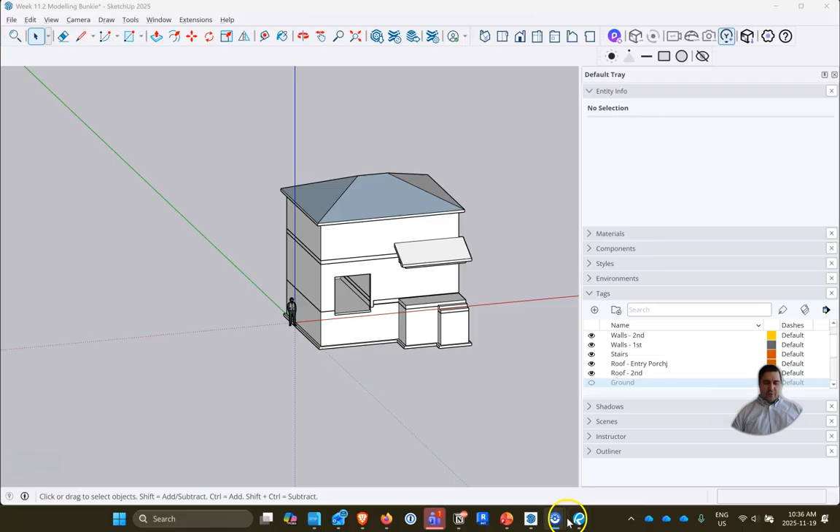All right, so in the last couple of weeks we modeled our building, and when you look at the drawings, the one thing most of you will notice is in this garage area we have this step footing area. The idea behind this is we don't have any basement below this garage, so why spend the extra money on forming all that formwork and digging down so deep and pouring all that extra concrete if we don't need it? So let's step the footings up, and then we don't have to pour as much concrete. We can save materials, we can save effort.

And so the building code has some rules associated with that. Is it not more labor to form that? Not necessarily. A lot of it ends up being about materials and concrete. So it might be a little bit more work to form a step footing, but it's often less materials, so less concrete, less rebar. Theoretically it's maybe a little bit more labor, but less money overall. And if this was a bigger building, you'd definitely see that cost trickle down. With a small building like this, maybe not, to be honest with you.

So the building code talks about how to do a step footing. Basically the building code states for every 4 feet in length, you can drop a maximum of 2 feet. So when we look at this, we're extending less than 4 feet and we're dropping less than 2 feet. We theoretically meet those requirements, and really it's about the angle as well.

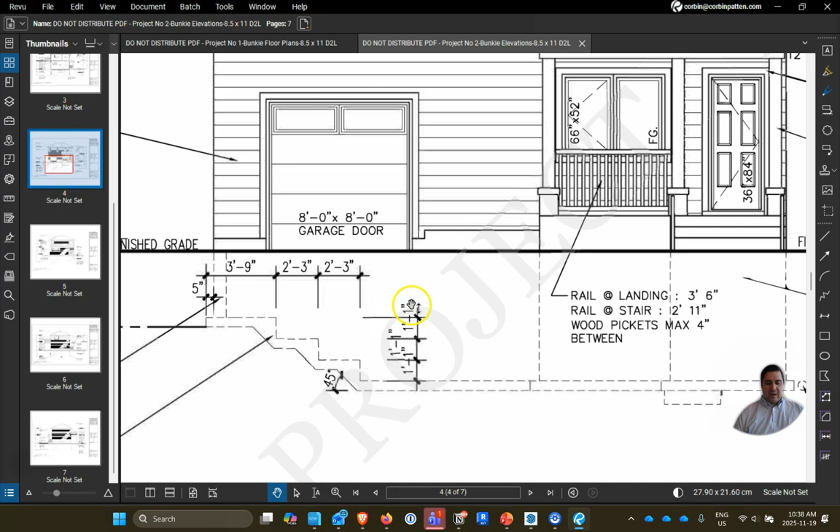So let's start modeling this up. What I'm going to do to start is I'm going to start at 3'9", and I'm going to work this direction and create a bit of a way for us to know those numbers. So let's go back to our SketchUp here. Our first number is 3'9".

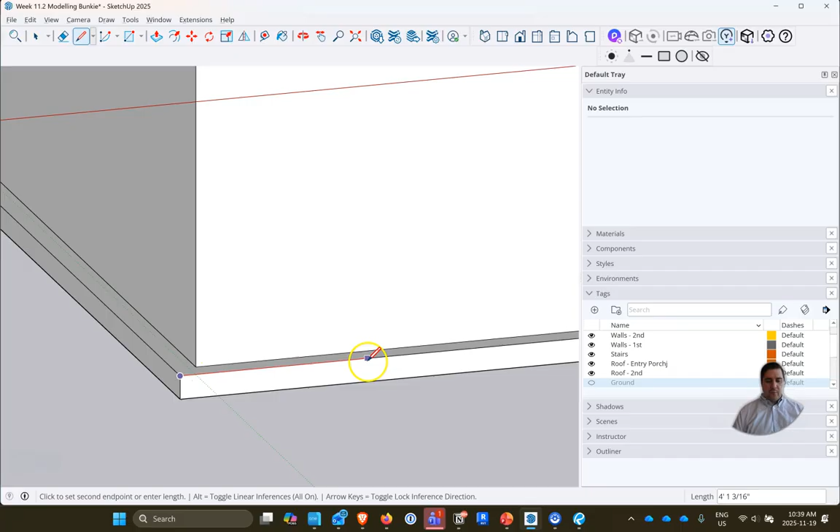I'm just going to start on the outer edge of our footing. We're going to go in 3 feet 9 inches. You'll notice that I'm specifically not editing the group. I'm going to actually create these lines outside of the group, and it's just going to provide me a reference, so I don't have to create all these lines within the group and then edit and remove them. I'm just going to do it outside the group, and then it's easier to remove later.

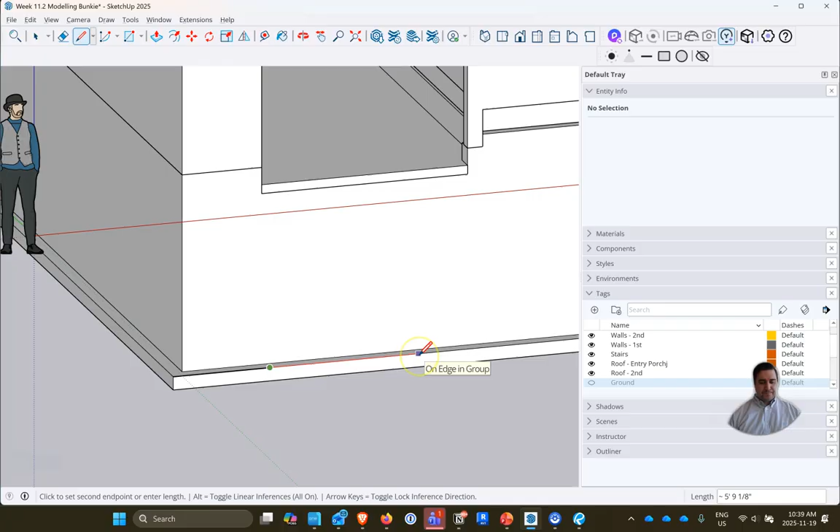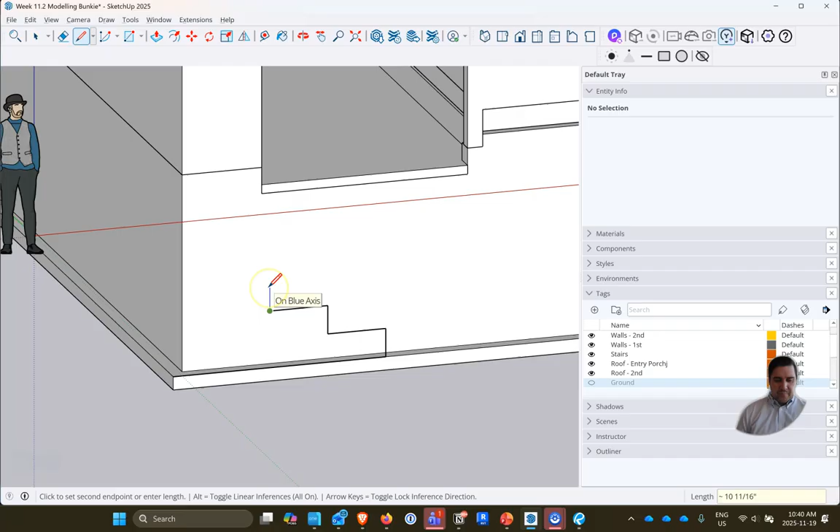So 3 feet 9. Next one is 2'3", and we've got 2 of those. We've got 2'3", and then we've got 2'3" again. Now we're going to go up. Our first step up is 1'1". We're going to go over this way our 2'3", which will connect here. We're going to go up our 1'1", and over our 2'3", and we'll go up again 1'1", and we'll go all the way to the end here.

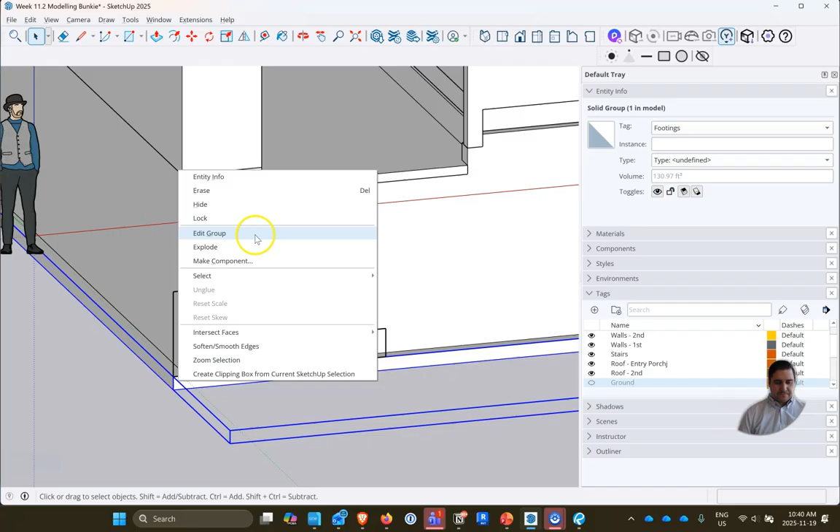And so that ends up being our footing. I'm going to delete this inner face, this inner part here. And what I'm going to do is edit our actual footing layer now. Let's edit group. So I've created those lines to trace, and it just gives me a starting point. That's super easy. So let's trace these now.

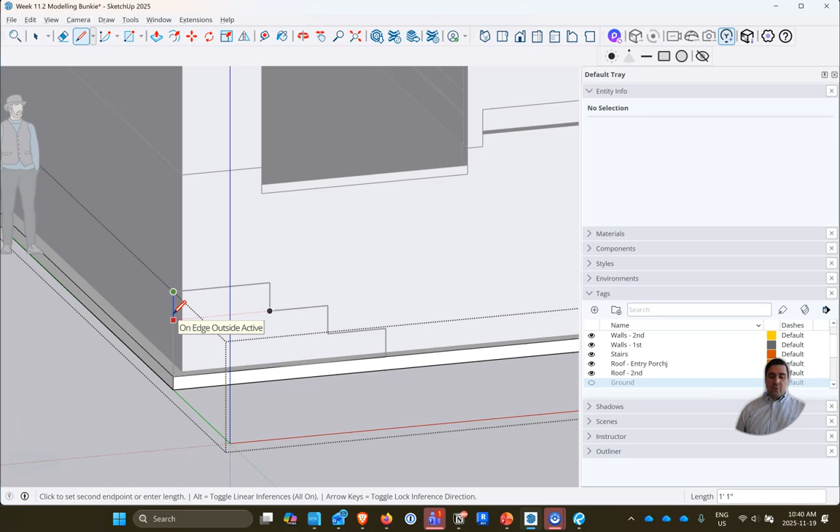Our footings are 6 inches tall, so instead of actually going all the way to the bottom, we're going to go over 6 inches, and we're going to bring that all the way across. We're going to go over our 6 inches. And we have these little steps here. So those are our footings.

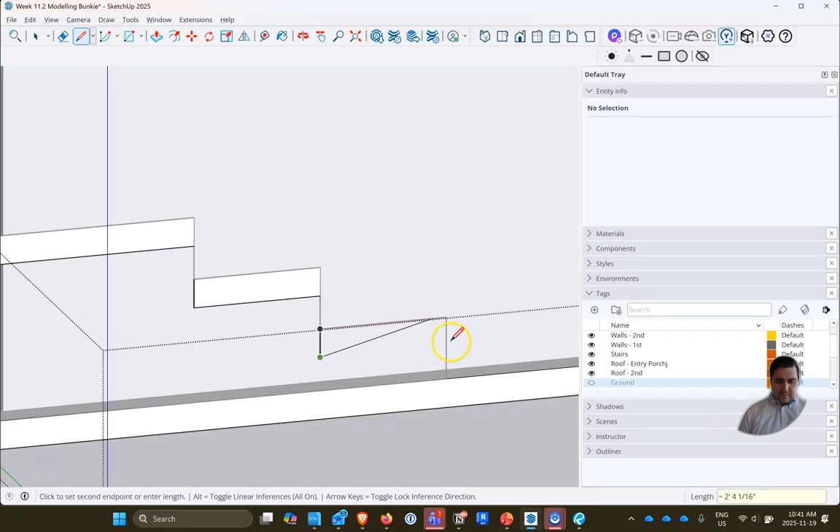The one thing you'll notice with the drawing is there's the angle part. If we just put our concrete like this, there would be nothing that really prevents it from moving because there's not really any stability. So what I'm going to do now is go back 6 inches, and go up. The reason why I'm going to do that is I want to create a bit of overlap, using the footing depth as our overlap number.

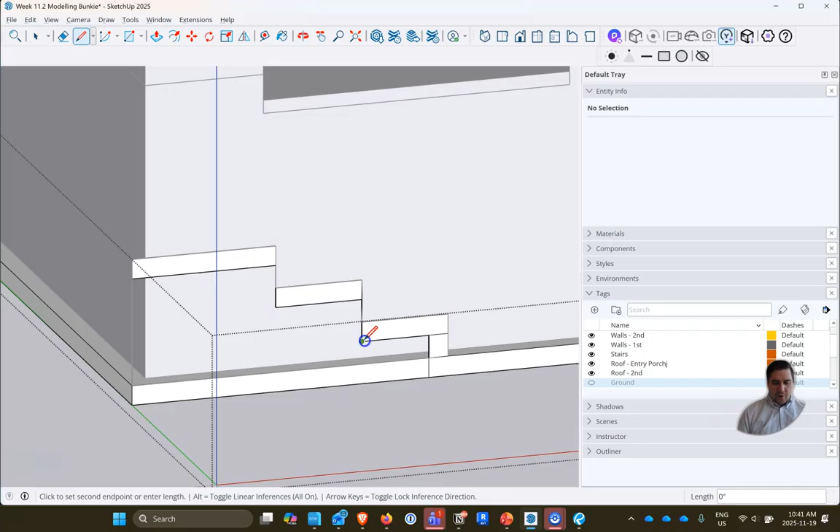So let's do that for all these 3 pieces. I could probably do this faster, but I also just want to explain my thinking. So let's go over 6 inches and then up. So again, we have our steps now. Our footing kind of follows that. But again, we have nothing to really hold that footing in there.

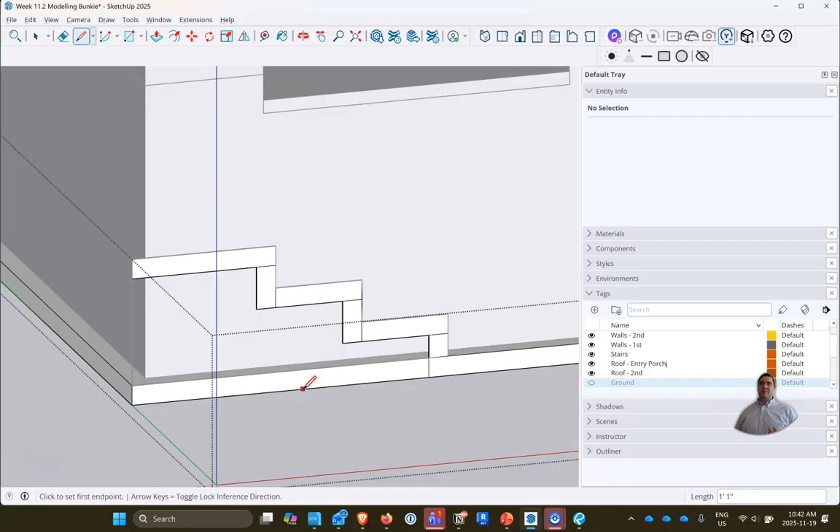What's really going to hold that footing is that slope. That slope is going to provide a lot of grip for these footings and prevent them from moving and doing weird things. So our height is 1'1". If we want to do a 45 degree angle, we're going to go 1'1" this way, 1'1" up, find that line and just draw that angle in there. And do the same here, 1'1", angle, 1'1", and then angle. Now that we have all of this in here, let's go and get rid of some of these lines.

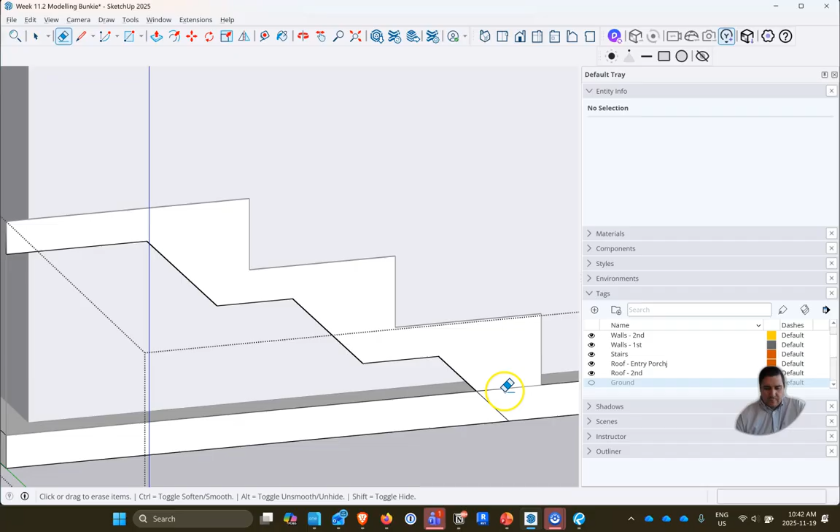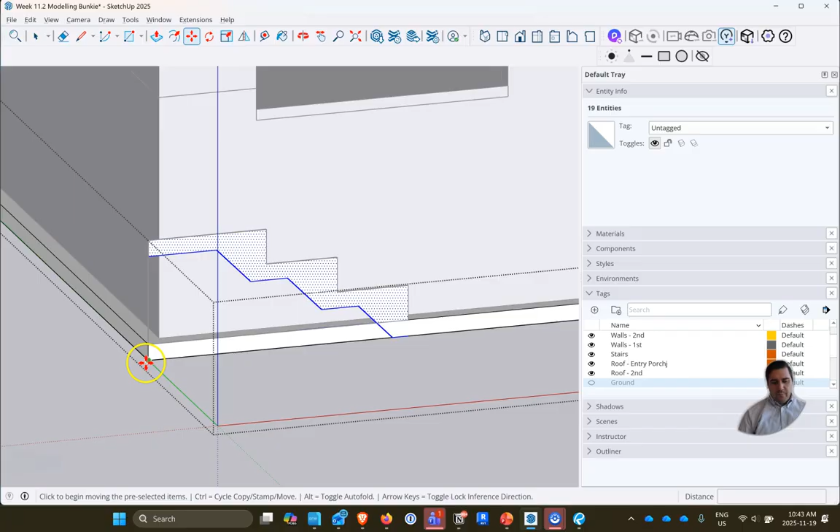One thing I'm going to do before I go too far, and I didn't do this in my other class—I was just thinking about this, and it might be a really effective way to copy all this. So I'm going to grab this, use the move button, and move based on this point right here. I'm going to move and hit the control button to copy, so we'll just copy that profile we just created to the other side, which prevents us from doing it twice.

So now we can do some extrusion. I'm going to hide my walls here, actually—let's hide our foundation walls.

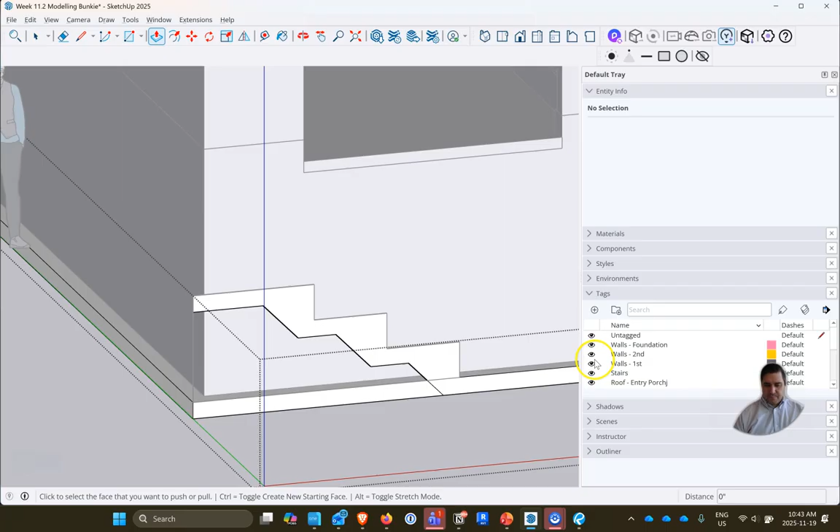I'm just going to extrude this in to our other side of our footing, and let's extrude this one in to the other side of our footing as well. I did this a little bit differently in the other class, and I was thinking about it after—I'm like, that was way too complicated, how can I do that faster? So I think this is a little bit of a faster and better way.

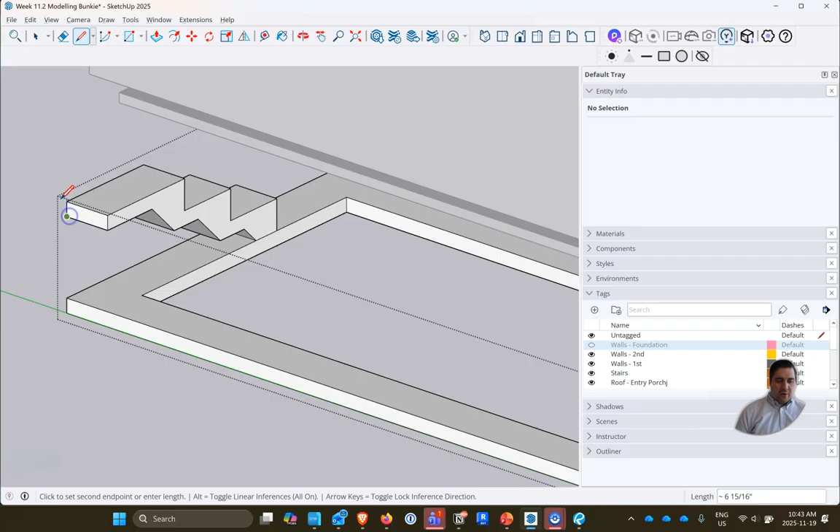Really what we want to do now is connect this whole end part here, like so—so we've got our end. Then let's just measure our footing. Our footing is 1'8", so let's extrude this part in 1'8".

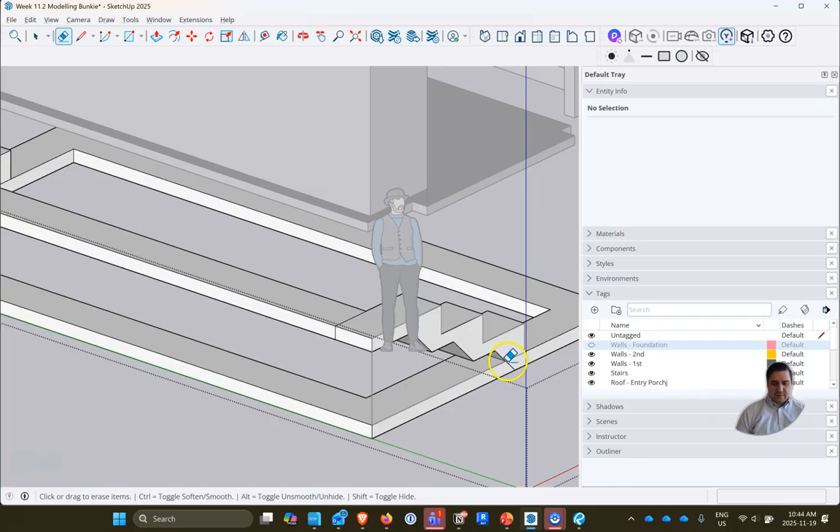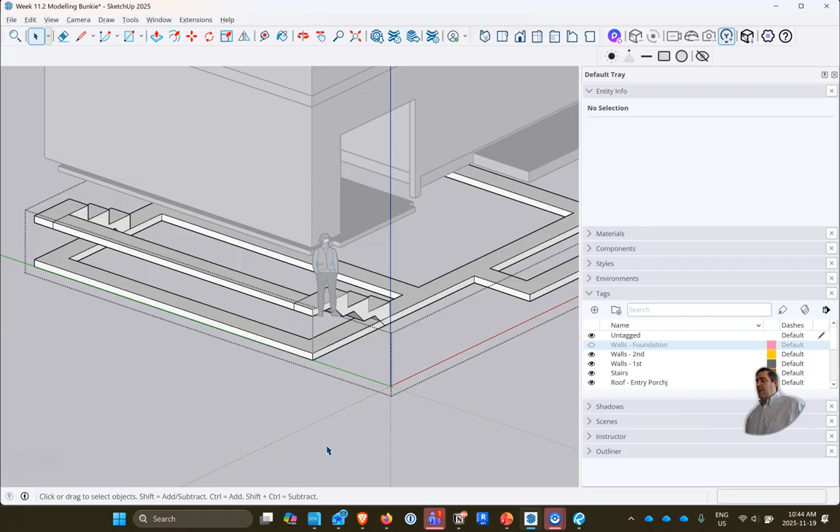And then we have a bunch of lines to clean up here. Again, as practice to improve your efficiency and simplicity, what we could simply do here is select all of this—I just don't know what lines were not created—and we can run our intersecting faces function. There may be one or two lines that just didn't get created for whatever reason, but by doing that step, it gives us a little bit of security knowing that we didn't miss a line.

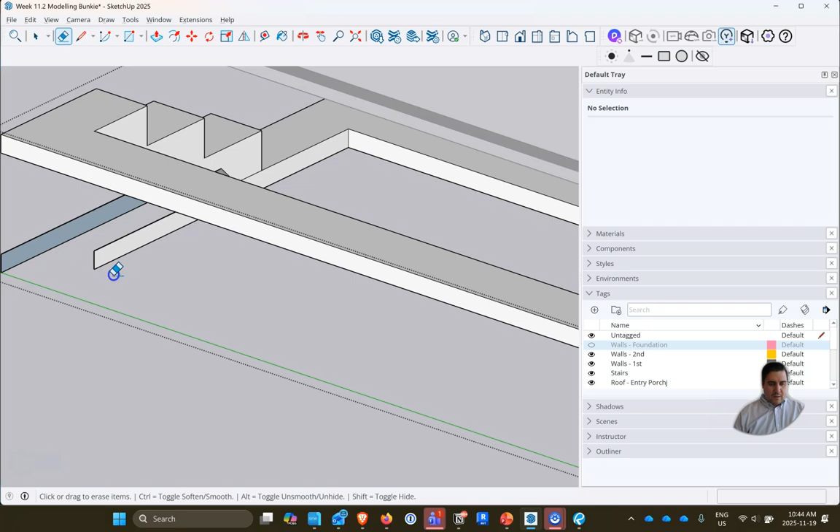So now let's go in and do some cleanup. Erase that, erase that, and we can obviously erase all these bottom lines now. We actually may have erased too much, but we'll find out in a second. Yeah, so that's what I'm kind of talking about there—it looks like we erased too much.

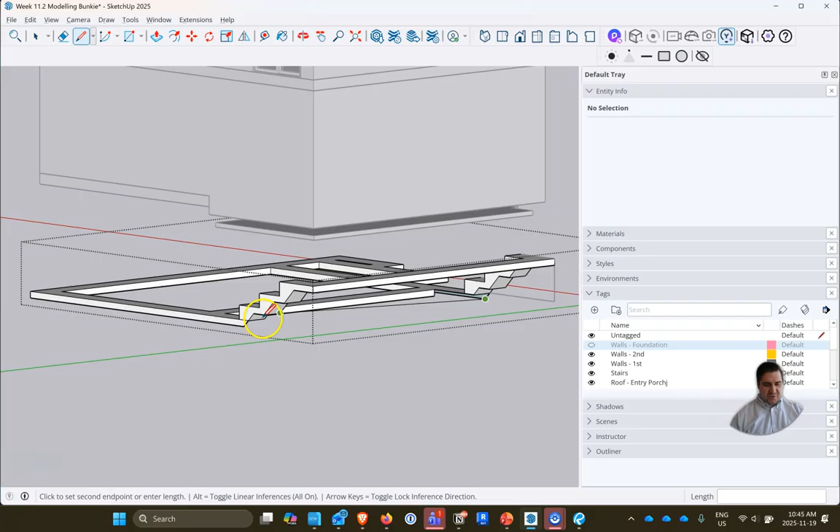But let's fix that. So we've got this line—is that going to go across? Nope, I'm just going to go straight across like this. And let's erase this now.

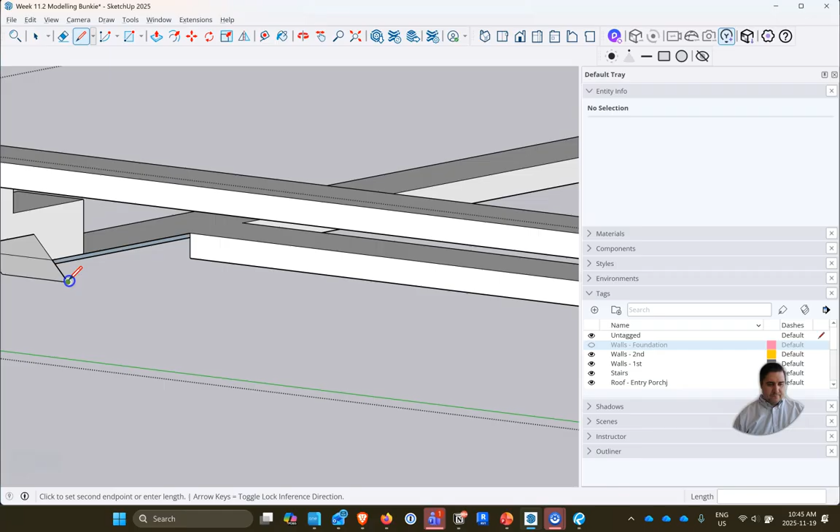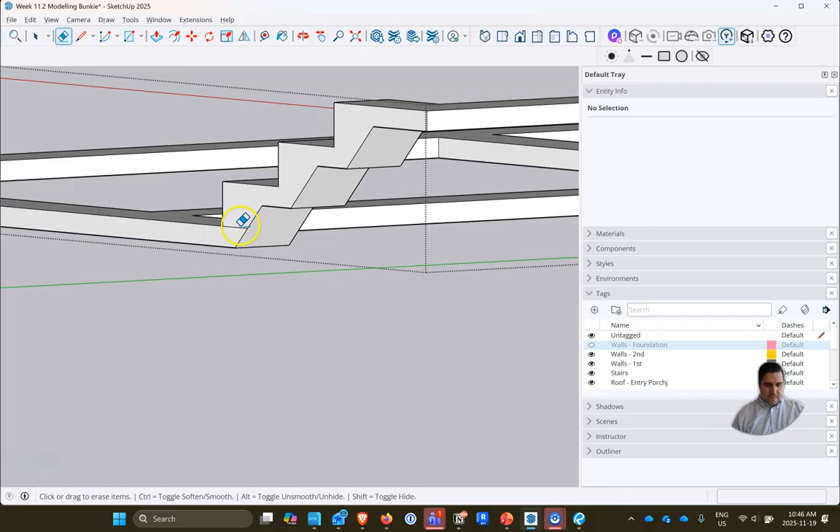And then we just got to connect this last part in, and do the same on this side. It looks like it filled in the middle here, so I'm just going to delete this middle part, and then just erase a few of these last little breadcrumbs left. I think that's pretty good—so we've got our step footings there.

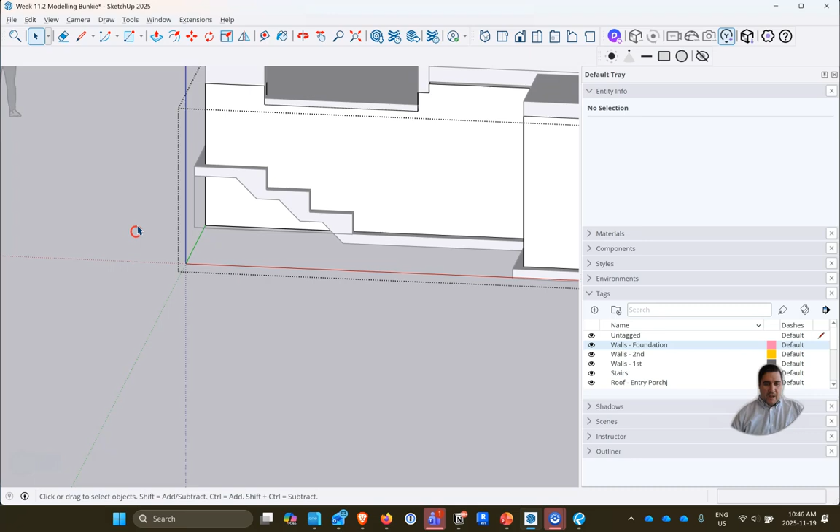So let's bring our walls back. The next thing you're going to notice is our walls also have to change. So let's go in here, close our group, and edit our wall group. Really this is just a simple tracing exercise, so let's trace these up.

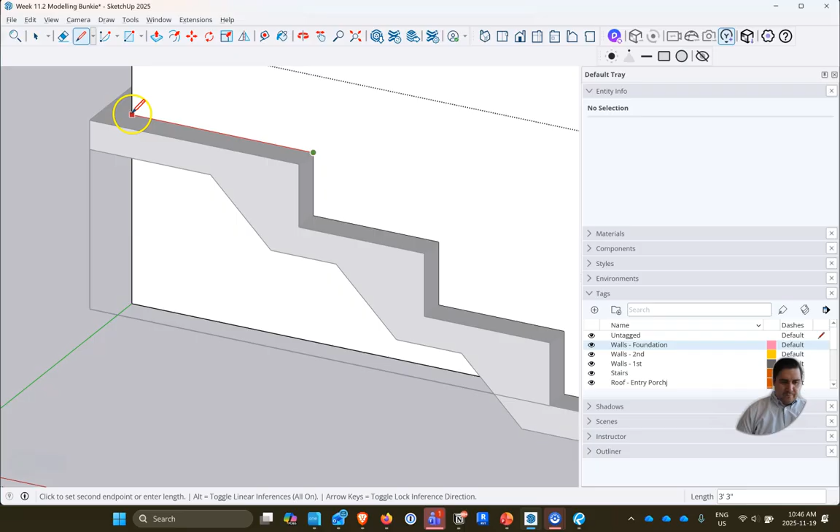What's going on there? There we go—nope, trace in the corner there. And on the inside, I'm actually just going to trace one line, if I can simply.

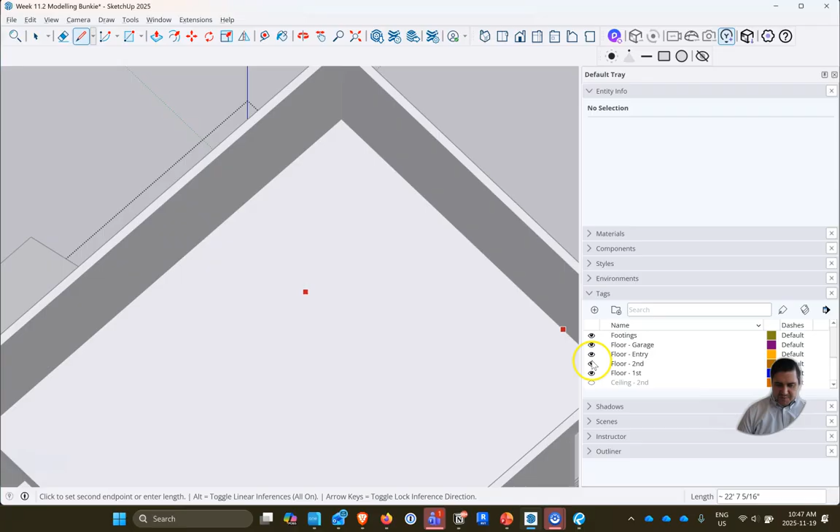Let me just turn off my roof here, and let's turn off the floors, turn off the garage floor. So I'm just going to trace this inner one—this inner one might be a useful one to trace.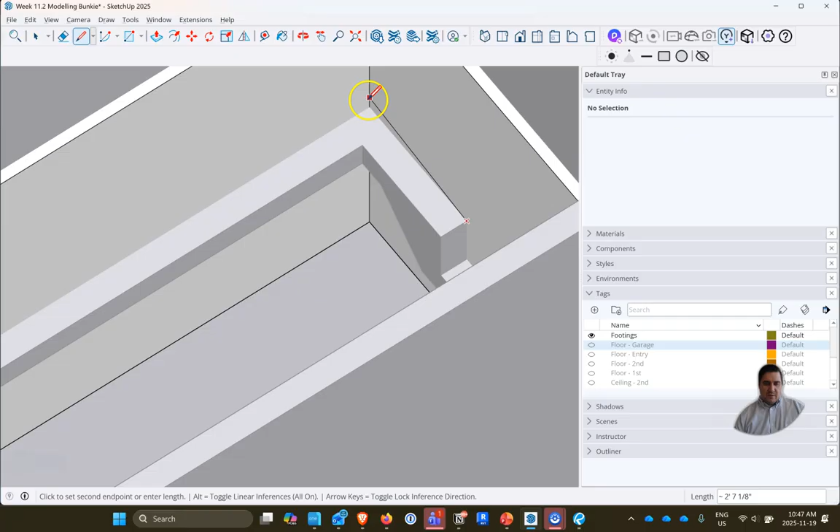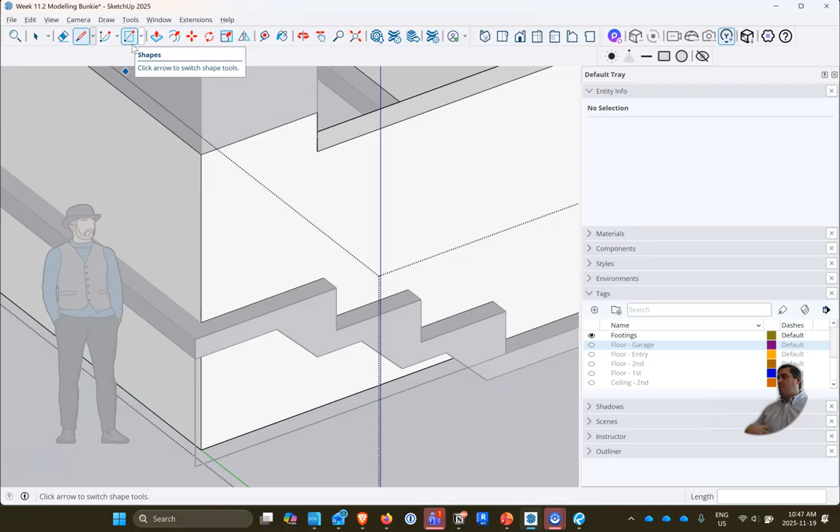And the reason why I'm also doing that is because we have this wall here. When I was doing it in the other class—this was me foreshadowing because I knew what it did—it didn't extrude through nicely, and I had to create a few more lines. So I think by starting with that, it prevents you from doing another step.

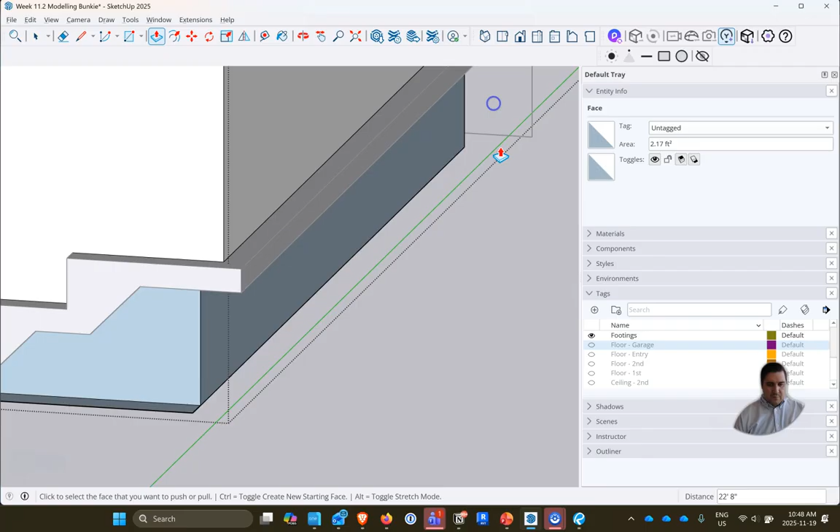So now let's extrude this bottom part through, and we can extrude this through probably to the other side as well, maybe. Yeah. And then this part we can—let's extrude this right here. Let's see if we can extrude that through. There we go, and then we should be able to just erase a bunch of stuff now.

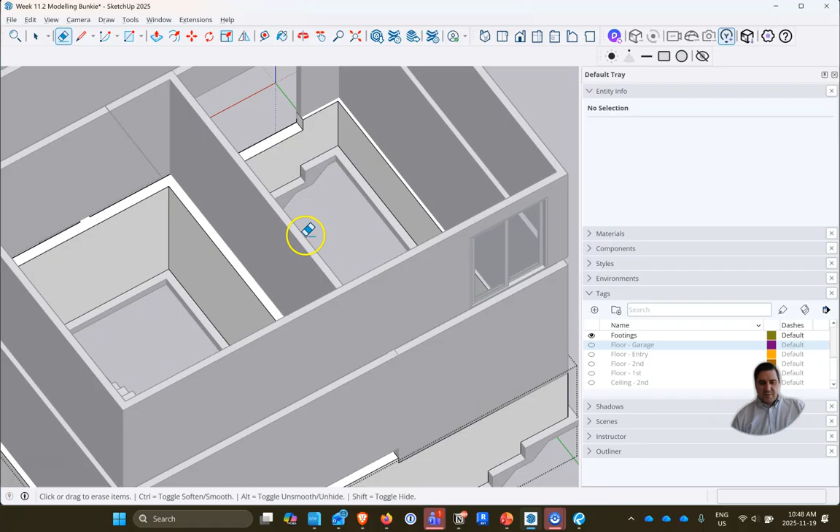How does that look from in here? Yeah, so there we go—we've got our walls stepping. I think that looks pretty clean. Oh, we're missing some lines here—that's what I was trying to avoid, but it's okay, we didn't do too badly.

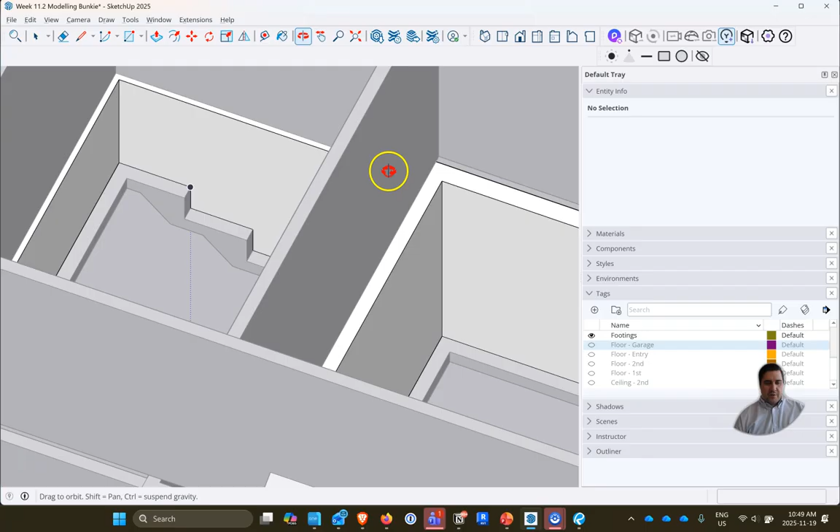There we go, just that one to fix. And so that's our step footing—that wasn't too bad. I think I was like 20-something minutes in the other class, so I'm faster now. That's step footings—not super complicated to do, but it is a little bit of work to do the various different steps. I didn't mean to have that pun, so no pun intended.

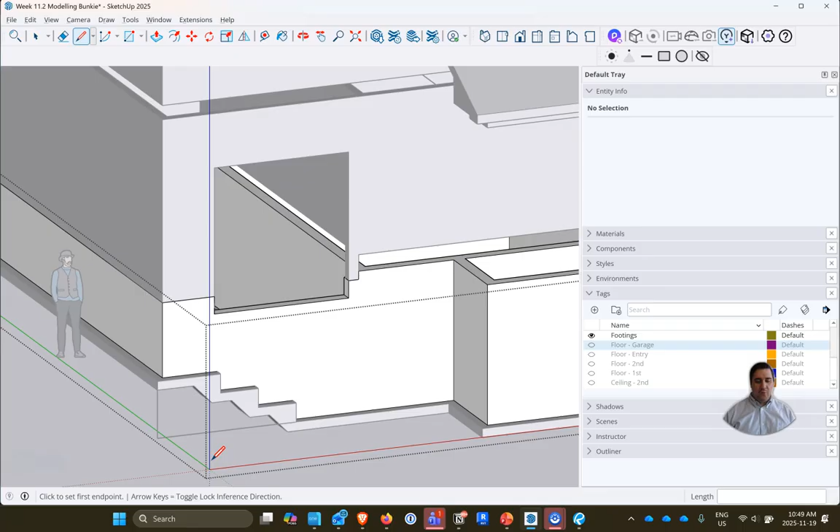If you're doing this from scratch, it could theoretically be a little bit easier to step this—maybe it's easier to step after. I would maybe argue it's probably better to model it very generically and then do the stepping process after, until you know exactly what you want to do. But that's how to step your footings.